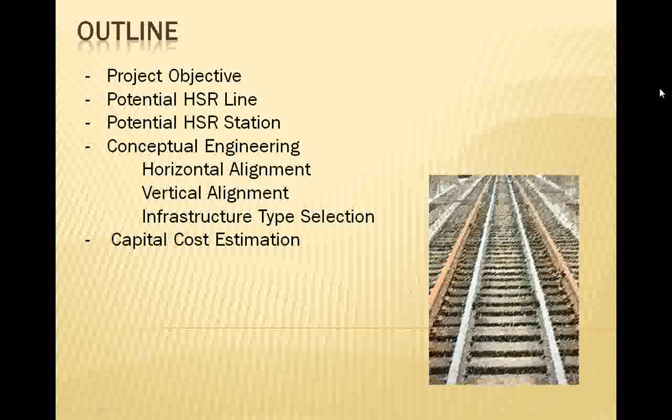The project objective for this feasibility study is the motivation. The motivation is because there is no direct transportation between Taiwan and other cities, and that is the initial brainstorming idea to let us think about the possibility of having an HSR between Taiwan and China. Basing on the good example of Eurostar, between Britain and France, we can have more information for our study.

For our preliminary evaluation of this new high-speed railway route between Taipei in Taiwan and Fuzhou in China, and other possible intermediate points.

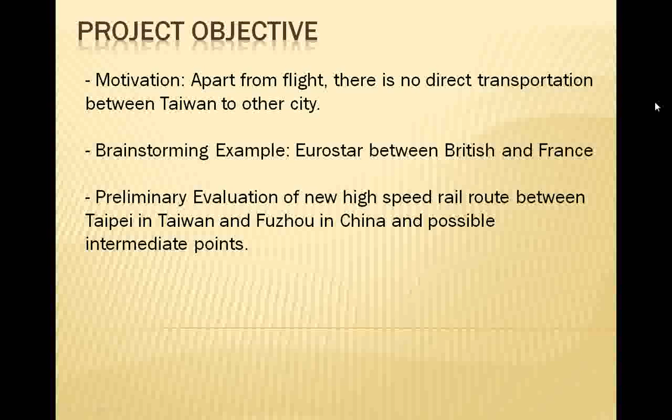Potential new HSR line. According to our study, for Fuzhou to Taipei, we find that in China, Fuzhou links to other Chinese cities with a lot of HSR railway. That is our proposal for having an HSR between Fuzhou and Taipei, because the distance is quite short.

We have 4 criteria for this new HSR. The first criteria is the metropolitan size. The Fuzhou population is around 7 million, which is the largest city in Fujian province. In Taipei, there is also 7 million, which is the capital in Taiwan.

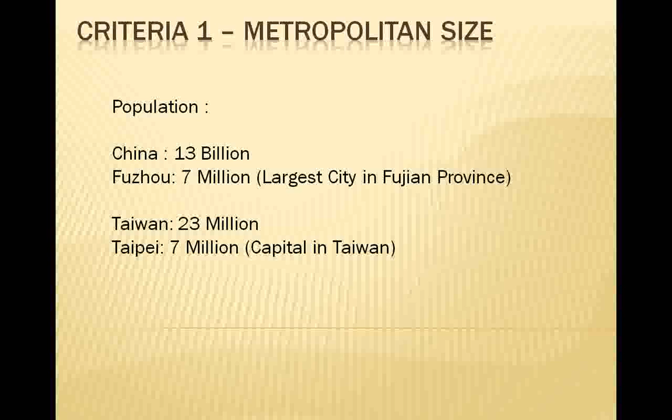The second criteria is the distance, as I mentioned. According to information from a paper on where high-speed railway works best, it stated that distances below 160 km are better for the normal railway network, and distances above 800 km are better suited for flight. The distance between Fuzhou and Taipei is around 300 km, which we think is most suitable for HSR railway.

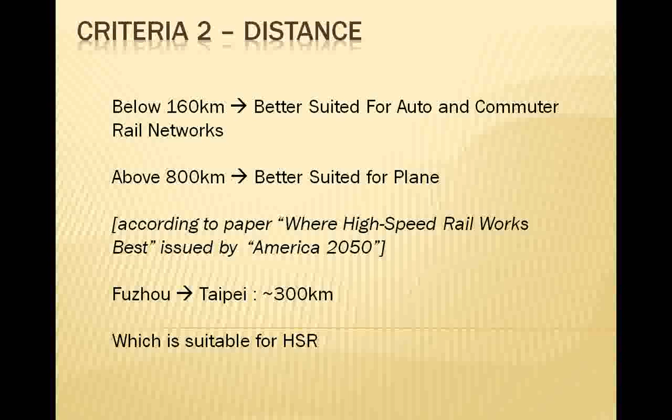For the information, HSR speed is normally above 250 km per hour, and for this HSR it is around 1 hour.

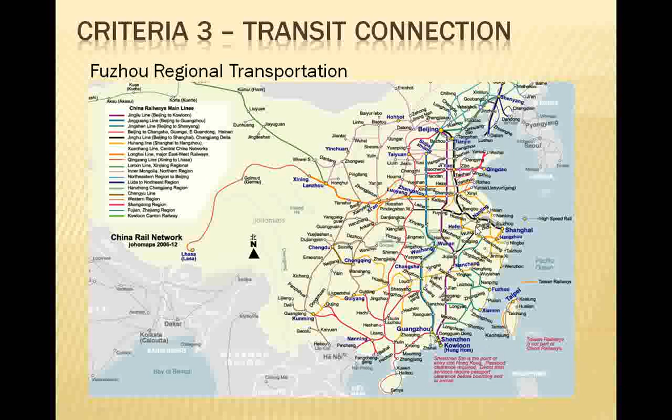The third criteria is the transit connection. In Fuzhou, we have a lot of connections to other Chinese cities, including Beijing, Shanghai, Chongqing, and many other places. You can see this from the map.

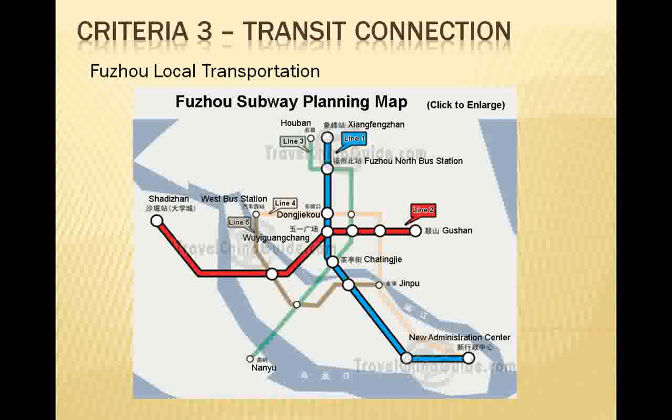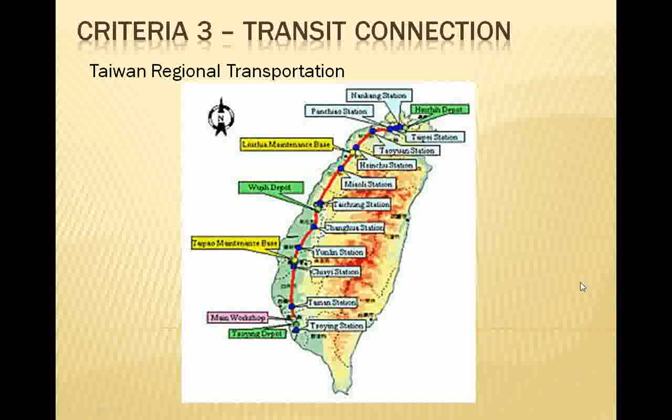Also, inside Fuzhou they have their metro connection network. From the Taiwan side, in these few years, the new HSR has been built in Taiwan, from Taipei to the Kaohsiung side. Within Taipei, there is also a very great and good network.

The fourth criteria we are studying is economic productivity. In Fuzhou, GDP is 6,000 USD, and in Taipei, it is 30,000 USD. Just for information, Shanghai has around 10,000 USD for GDP. So we can see that Fuzhou is also a very good economic city.

The next topic is potential locations for the HSR station. In this analysis, we will take two locations in Taipei and also two locations on the China side.

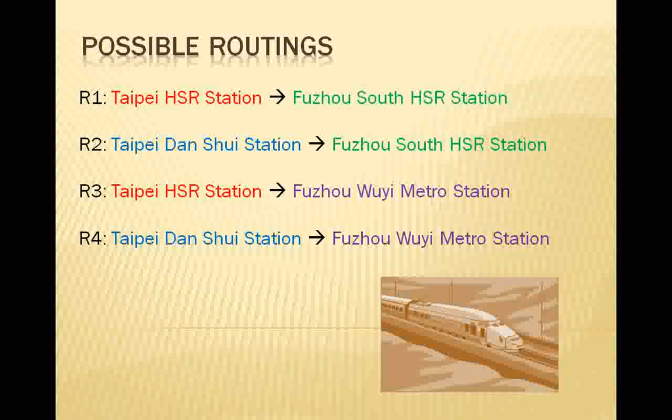In order to quantify which route is the best, we propose an assessment method, and here is the assessment methodology. For this methodology, we will consider three main aspects. As you can see in this picture, the first is the economic aspect, which contributes the most among the three aspects at 60%. The second is the human factor aspect, which contributes 18% of the total. The last one is the engineering aspect, which contributes 22%.

Among these three main aspects, we can subdivide this main point into different considerations. For the economic aspect, we will consider the estimated traffic and also the population served. For each sub-aspect, we will use a letter to represent it. For example, for estimated traffic, we'll use ET to represent this factor. For the economic aspect, the total contribution is 100%.

In the same way, for the human factor aspect, we will assess accessibility, which contributes 75%, and interchange and transfer for 25%. For the third aspect, the engineering aspect, we will mainly consider the construction costs for this high-speed railway line.

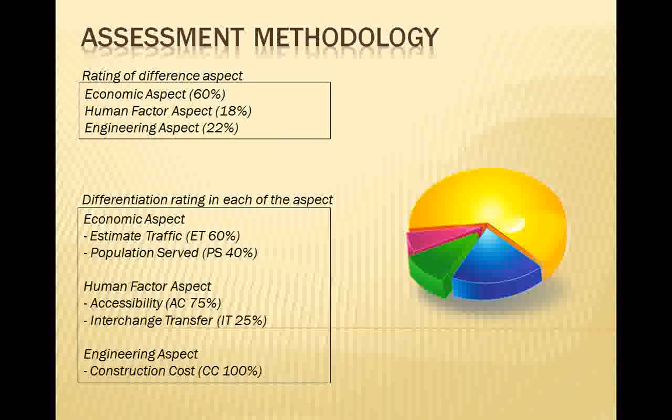Summarizing the previous page, we can construct equations for each of the three aspects. For the economic value, we propose an equation of 60% ET plus 40% PS, and this equation contributes 60%. For the human factor value, the equation is 0.75 IT plus 0.25 AC. As for engineering value, it is 100% of the construction cost.

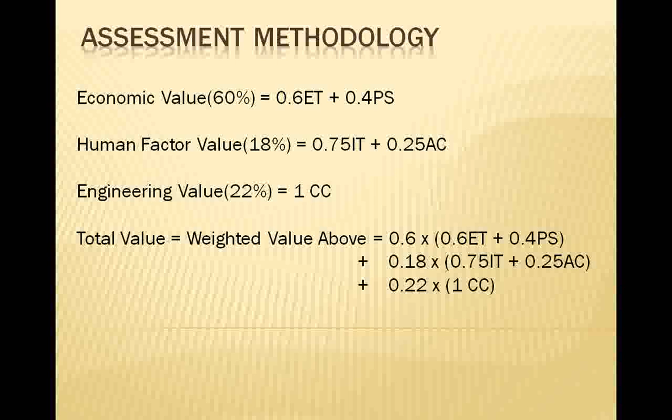Therefore, the total value of each candidate is the weighted average of the above three aspects, so the overall equation is this. Using this equation, there are 5 different aspects. For each aspect, we will allocate marks to each route, and the maximum mark for each aspect is 10 marks.

In this table, you can see for estimated traffic, Route 3 and Route 1 have a high mark because the Taipei HSR station has higher traffic flow. For population served, Route 1 and Route 3 also have higher population in the station district, mainly for Taipei.

For accessibility, it is easier for people to travel via Route 1 and Route 3, because Route 1, which is Taipei HSR station and Fuzhou South HSR station, has so many ways that people can reach it. Also for interchange and transfer, Route 1 has the highest mark, so it has easier transportation from the station, with many routes to choose to go to other places.

Finally, for construction cost, Route 2 and Route 4 have the higher mark, therefore the construction cost is cheaper.

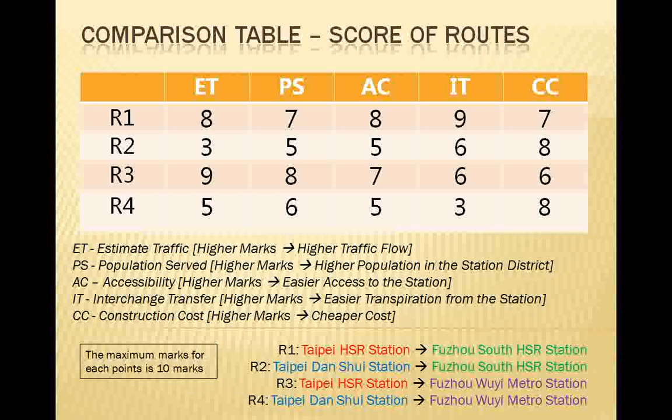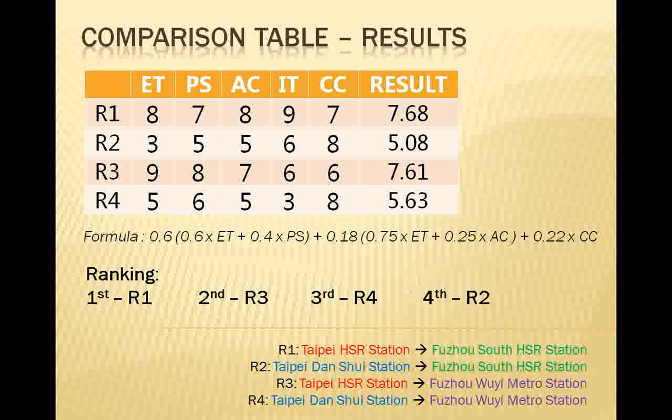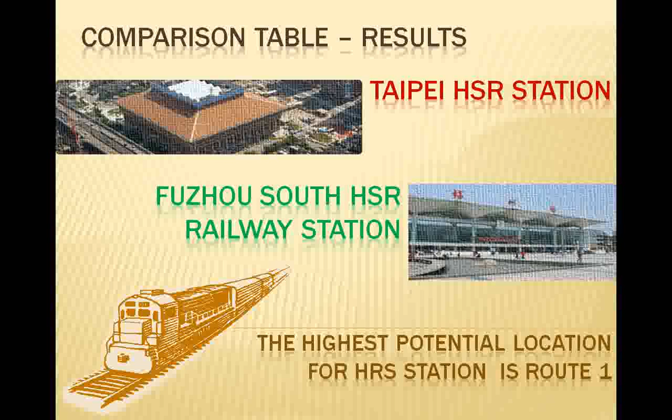By summarizing these marks and putting them into the formula, the total result is calculated. After the calculation, we can conclude that the highest mark is Route 1, around 7.7 marks, followed by Route 3, then Route 4, and last is Route 2. Therefore, after this scientific analysis, we conclude that our station choice from Taiwan is Taipei HSR station, and from the China side is Fuzhou South HSR railway station.

The next point is about the conceptual engineering. We will assess the horizontal section to find the conceptual engineering. There are two possible developed railroads. The red one is from Fuzhou to Hunan along the East China Sea to Taipei. Another route is the green one, from Fuzhou to Pingtan along the South China Sea to Taipei.

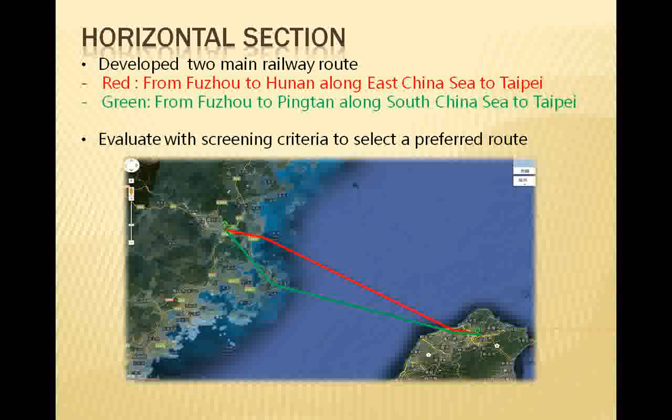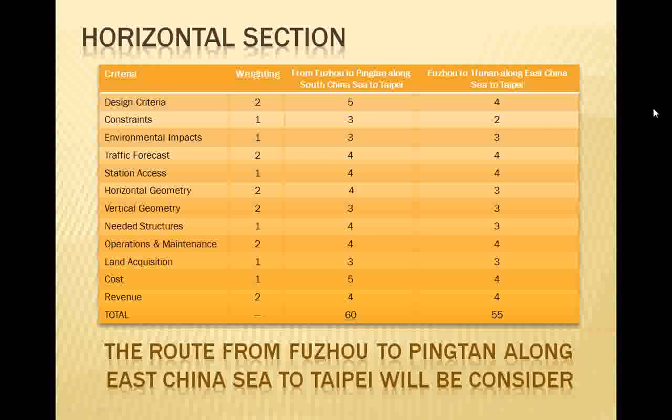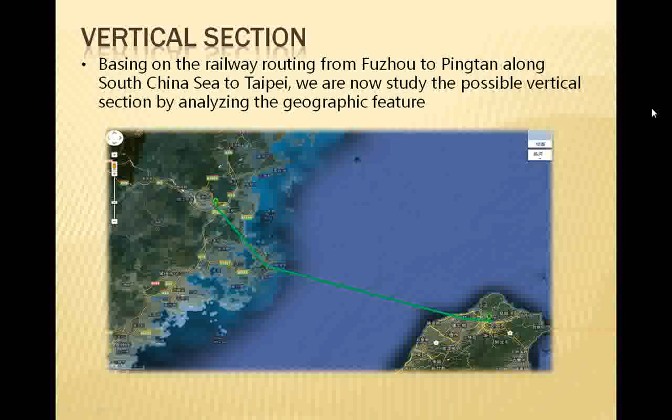Another one is the vertical section analysis. Based on the railway routing from Fuzhou to Pingtan along the South China Sea to Taipei, we studied the possible vertical section by analyzing the geographic features.

From this detailed mapping, on the Fuzhou side, we suggest building the high-speed railway along the existing road, because the construction cost will be cheaper than building it on high mountain areas.

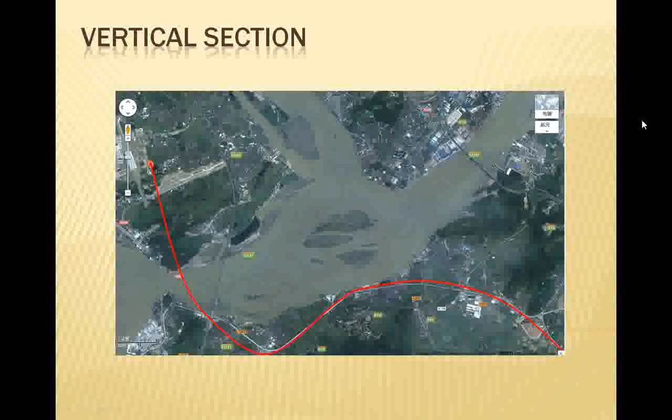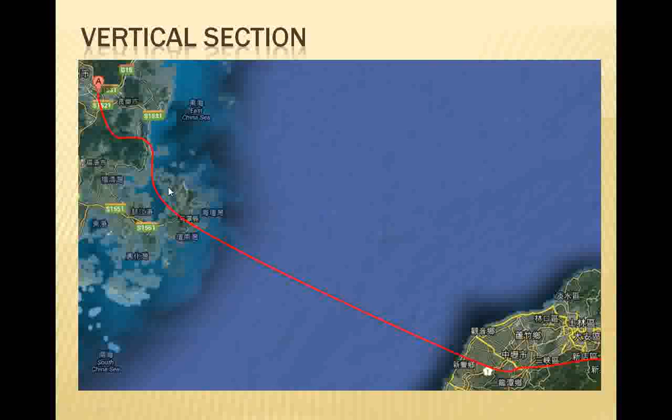Continuing toward Fuzhou, to this side near the seaside, we are proposing a tunnel below the water. This proposal is based on our study and information from Eurostar, which is why we have this proposal.

On the Taiwan side, we are proposing having the route near the existing train station.

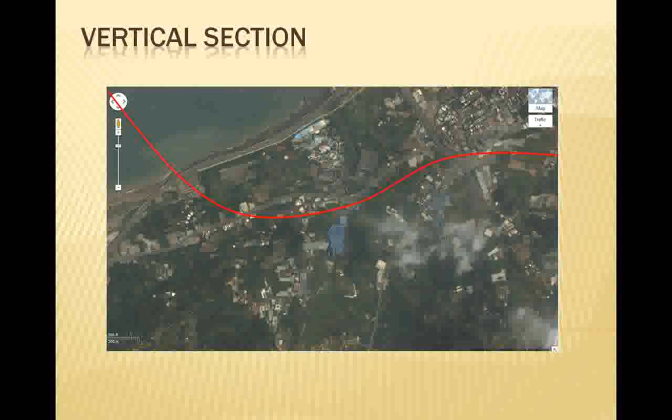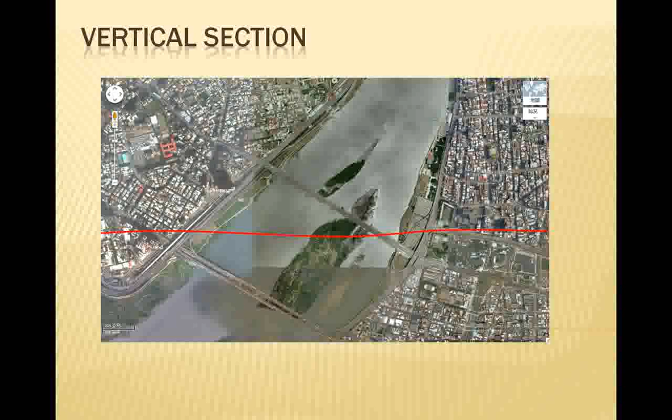And because the Taiwan high-speed railway station is also in a high location. Here is the Taiwan train station.

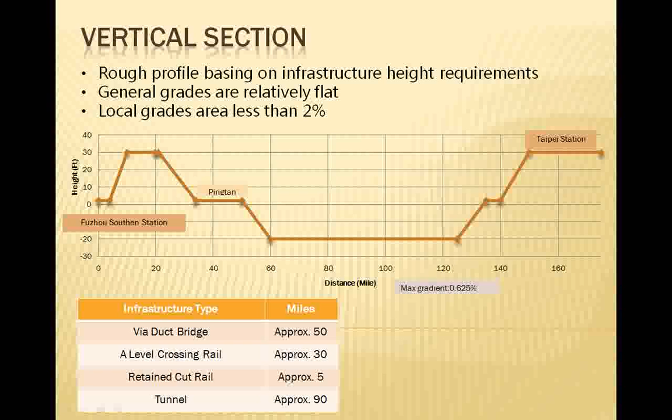In this design we are also very careful about the gradient, which is less than 2%, according to some information that the gradient of the HSR should not be more than 2%. Our maximum gradient is about 0.625%.

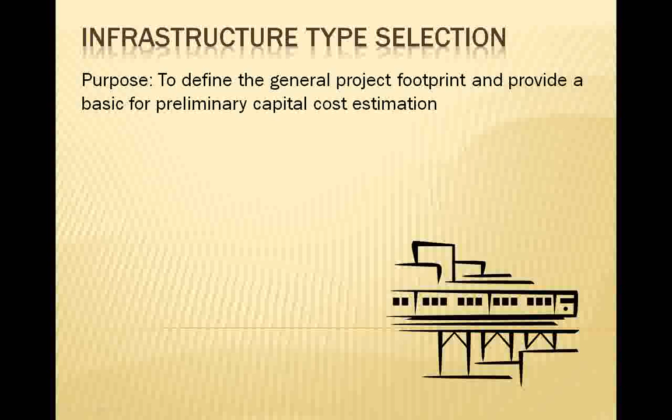Below are the infrastructure type selections that we are having. The purpose of this selection is to define the general project footprint and provide a baseline for preliminary capital cost estimation. There are 4 types of infrastructure that we're choosing.

The first infrastructure is the viaduct bridge. It's composed of different spans crossing over the valley, the building, and crossing over the existing road. The second one is the level crossing rail.

The third one is the retained cut rail, which is used to drop the HSR from the high side to the low side, down to sea level and below. The final one is the tunnel. The tunnel passes through - it's just a rail which is underground, and in our case it is under the water.

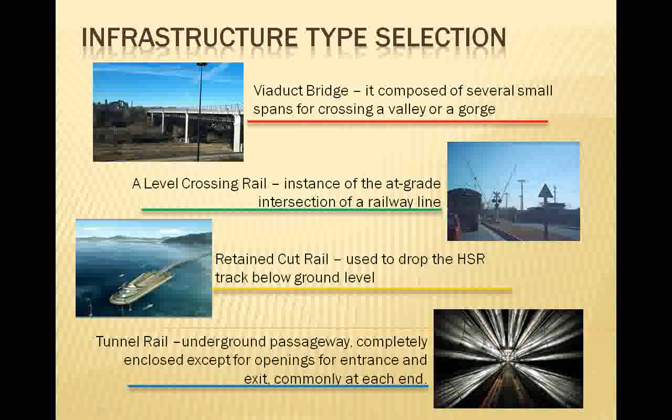It is because for some underwater construction for the tunnel between China and Taiwan side, the construction cost must be much higher than on the land.

Besides this track structure, the second largest cost belongs to site work, right of way, land, and existing improvement. Because in China the infrastructure is not so good enough, the site work needs to be reconstructed. Also the land acquisition - the government needs money to buy the land for building the high-speed railway station, the viaduct, and the underground construction.